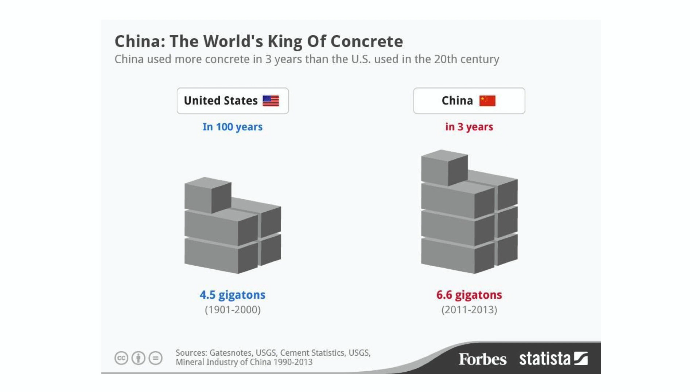Furthermore, as you probably know, buildings contribute about 40% of global carbon emissions, and concrete alone makes up about 8% of global carbon emissions. Yet, by many accounts, there is not even enough sand of the right type to make even the concrete foundations for all of these buildings of the next 30 years. In other words, it's impossible to think about the climate crisis without thinking about architecture and without thinking about scale.

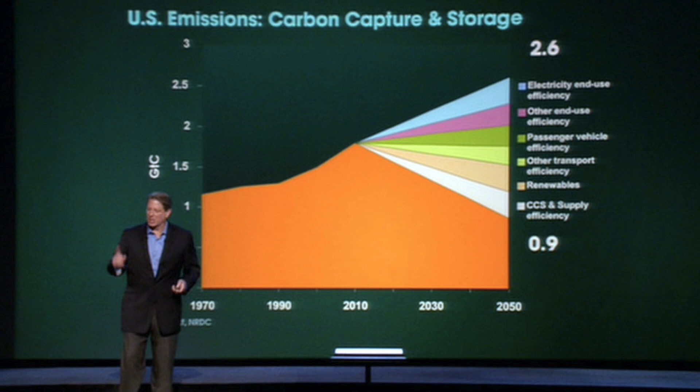So it may be tempting to look for single changes to fix the problem. Technologies like carbon capture, shown here, or new ways of making concrete, getting rid of that 8% of carbon emissions, or low-cost solar and wind power, or even lifestyle shifts. But there is a flaw in that science indicates that a single fix is impossible. Instead, we need what are called climate stabilization wedges, as Al Gore showed in his film Inconvenient Truth.

But maybe more fundamentally, I think it's important to consider that single technology fixes, and even climate stabilization wedges, should not be developed in isolation. In fact, they may have some unintended consequences if we don't think them through carefully.

You may have read this same devastating story that I read about a year ago in the New York Times, with the title: 'Palm Oil was supposed to help save the planet. Instead, it unleashed a catastrophe.' I'll just summarize that story here. It's a story of a misguided United States policy that also became European policy to ramp up the use of vegetable oils, such as palm oil, in fuel, including gasoline, with the ambition of reducing carbon dioxide and curbing global warming.

Palm oil trees grow in tropical climates, such as Indonesia, and each tree produces these 50-pound bunches of walnut-sized fruit that are full of an oil that's more versatile than almost any other plant-based oil. So the idea was to encourage the use of vegetable oils in fuel, and potentially by encouraging more palm oil production.

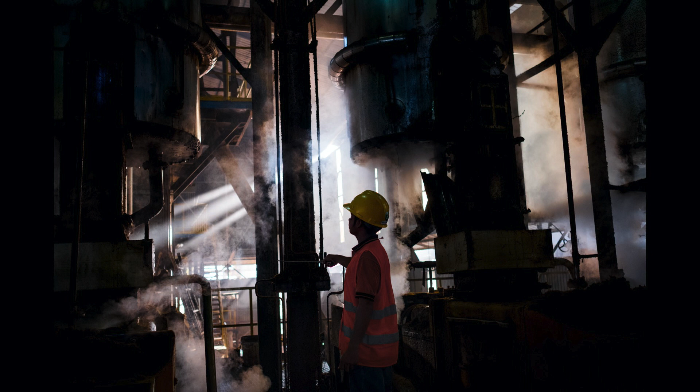So instead of creating a clever technocratic fix to reduce the United States carbon footprint, lawmakers actually, in the words of the article, lit a fuse in a powerful carbon bomb that, as the forests were cleared and burned, produced more carbon than the entire continent of Europe. Indonesia then jumped to become the fourth largest emitter of carbon. The unprecedented palm oil boom, meanwhile, has enriched and emboldened many of the region's largest corporations, which have begun using their newfound power and wealth to suppress critics, abuse workers, and acquire more land to produce more oil.

So I guess my point here is that instead of looking for single technology fixes and trying to design single technology fixes, I think what is more likely to address the problem, even if we're single-mindedly fixed on that problem, is to design new systems - and this comes with understanding architecture itself as an open system.

So I believe that as citizens and as architects, of course, we will have to become more literate in terms of the numbers - which actions and activities have which impact, what are the biggest levers, what are the sizes of the climate stabilization wedges.

This is a kind of system diagram that we don't need to understand the details of, but just to get a sense of some of the interconnected forces and relationships in the biochemical pathways in what's going on in cells and biology. So systems we might look for that involve designing energy and materials and labor, as well as the typical form and function of a single building.

And of course, thinking about architecture as a system is not new for the discipline. People like Howard Odum and Buckminster Fuller were advocating for holistic thinking many years ago, drawing some of the diagrams like this. And it's clear to me that, and to these precedent thinkers and designers, that architects have the potential to redesign systems that are much larger than buildings, systems that involve global flows of energy and raw materials.

As Rosalie noted, this actually suggests a redefinition of architecture. We could say that architecture should involve a longer duration and a wider geography, more time and more space than we typically consider. And we could imagine that architecture really is, at heart, an open system.

And this kind of thinking about systems has been advanced more recently in other areas such as food. So the chef and writer Dan Barber explains how the initial framing of the farm-to-table movement, which he helped found, actually turned out to be wrong.

And he writes, "Science teaches us that the answer to understanding the complexity of something is to break it into its component parts. It insists that things need to be precisely measured and weighed. But interactions and relationships cannot be measured or weighed. Our belief that we can create a sustainable diet for ourselves by cherry-picking great ingredients is wrong because it's too narrow-minded. We can't think about changing parts of our system. We need to think about redesigning the whole system."

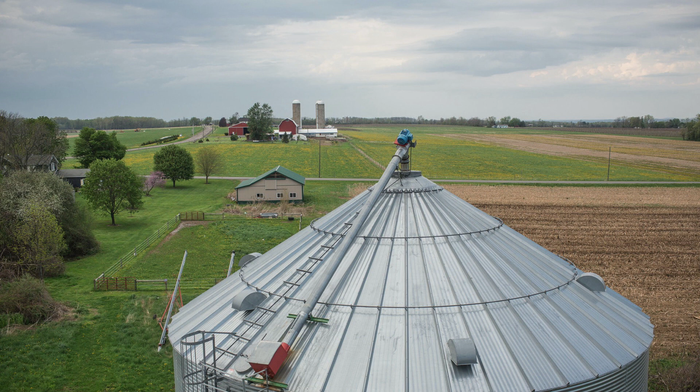And as an example, Dan Barber picks wheat and describes how a New York farmer that he knows named Klaas Martens grows a sustainable emmer wheat, and he has resurrected a lost flavor that has actually contributed to Barber's own cuisine, a cuisine that wins awards.

So Barber continues by writing, "The secret to great tasting wheat is that it's not about the wheat, it's about the soil. Martens designs the soil, not the wheat, and he does this through rotation farming and working with the larger system."

By extension, we could say it's important to simultaneously design all of these things at once: the grain, the soil, the food plate or the cuisine, and even new flavors. And perhaps for architecture, we could say it's important to design the material, the materials factory, the

processes of the material, the building, and even new building typologies all at the same time. In this sense, architectural materials should no longer be considered static and permanent, but instead dynamic and continually transforming. And architects should take the initiative to actively design these kinds of transformations. In other words, to address the urban growth I just described, single, fixed, solitary architecture projects won't cut it.

The climate crisis gives us new urgency and new context to think about architecture as an open and dynamic system. And tonight I want to share several rough examples that I think may be relevant and instructive in this context. These examples are not perfect. In fact, some of them may be problematic in some ways.

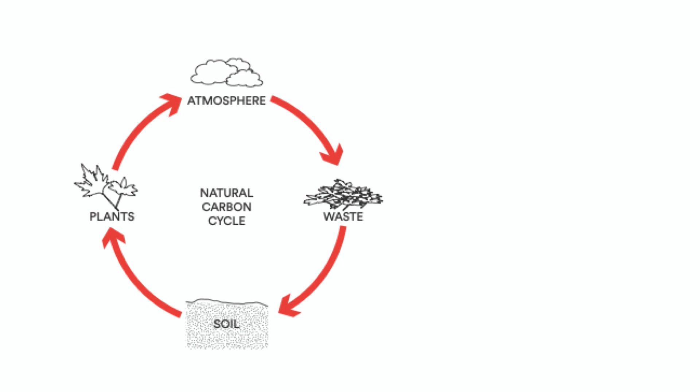And at the Living, in my own design studio, we've experimented with materials that are grown from the root-like structure of mushrooms called mycelium. We began here by thinking of a system of architectural materials and its relationship to the Earth's carbon cycle, the endless loop of growth, decay, regrowth, and transformation of carbon.

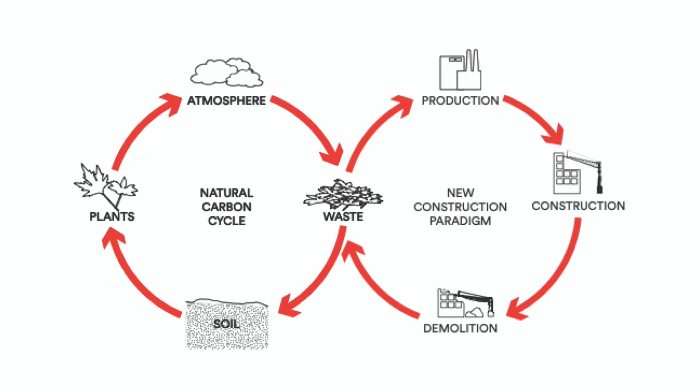And starting with this concept, we had the idea that maybe we could take low-value raw materials, in other words, waste, spend a small amount of energy converting those raw materials into building blocks, make some kind of building or structure, and at the end of the useful life of that structure, take all of that physical matter, all the materials of the building, and return them back to the carbon cycle.

And the way we set out to do this was with living organism and grown materials. So here is the branching structure of mycelium shown in a microscope video.

It turns out if you combine mycelium with agricultural waste, so not the high-value part of agriculture, for example not corn kernels, but the low-value part, just chopped up corn stover, combine mycelium and this agricultural waste, put it in a mold of almost any shape, and in about 5 days it grows into a solid object, which could be used for a number of different design applications.

So our collaborator, this great company in upstate New York called Ecovative, is using this material as a replacement for styrofoam in packaging. And our idea was to see if we could use it for a new kind of architectural brick.

And of course, we had to do a lot of testing. Here we were working with another collaborator, the Strength of Materials Lab at Columbia University, also with some structural engineers at Arup, testing single bricks and small assemblies of bricks.

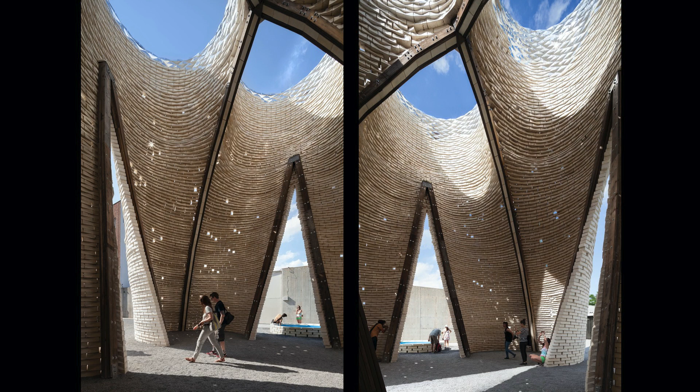It offered a relationship to municipal artists and nonprofits, and also to local community gardens. People working on the project included local artists, local trade school interns from the Brooklyn Navy Yard, international graduate students from Columbia, construction professionals, engineering professionals, and also people from nonprofits such as the Brooklyn Grange. All people involved in the project, as we were engaging a kind of labor even in this experiment, were meaningfully engaged and fairly paid.

The project also engaged a diverse public through its high-profile installation at a museum. Considering the project as an example of this idea of architecture as an open system, the project involved multiple sites, multiple scales, multiple collaborators, and maybe most essentially, multiple timescales.

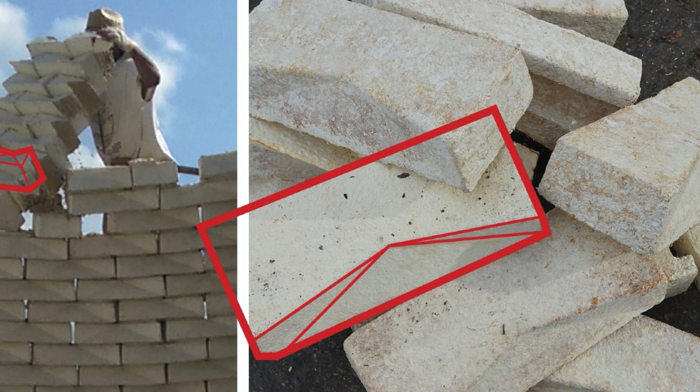Because at the end of the summer, we took apart the structure, crumbled the bricks into smaller pieces, combined these pieces with yet other living organisms in terms of worms and bacteria. In about 60 days, all of the bricks, the entire structure, was returned to soil through composting, which we gave for New York City tree planting and also for local community gardens, in essence showing that this was a non-toxic enough material that it could in turn be eaten.

So for our design studio, the project involved not only a kind of strange test of a new material, but also tools and insights and approaches that we think can be reused on other projects in the future. In other words, it can help us when thinking about architecture as a system to not start every project from scratch. Along these lines, I think it's interesting to note that 3M, the large materials company, which is actually known for inventing things like the Post-it and Scotch tape and using a lot of petrochemicals.

But 3M is investing heavily in mycelium materials, which is a whole other topic, but I think it's interesting to note their reasoning, or at least their stated reasoning.

They think that mycelium materials can be a materials platform like plastics. In other words, we know that plastics can make materials that are like fabric, and they're flexible, or they can make material that's hard and rigid. There are materials in plastics that are foam-like and lightweight, also materials that are dense. At 3M and many other biologists and scientists think that mycelium materials might be able to offer a similar materials platform, a substitute for our reliance on petroleum-based materials.

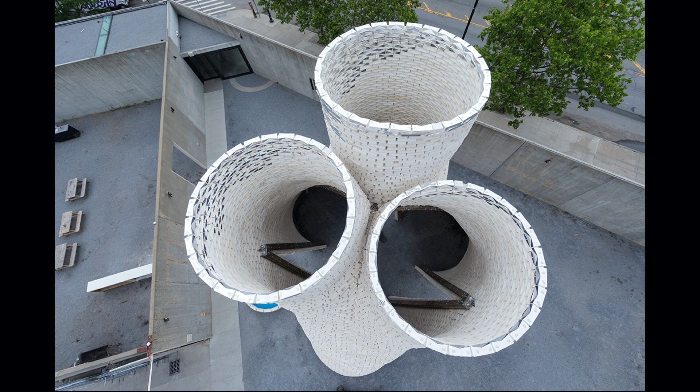But I think along these lines, maybe we could say that with systems, a change in one element makes you rethink many other elements. A mycelium brick is not only a replacement for a clay brick or a concrete brick, it's also a new type of brick and a new way of thinking about materials themselves.

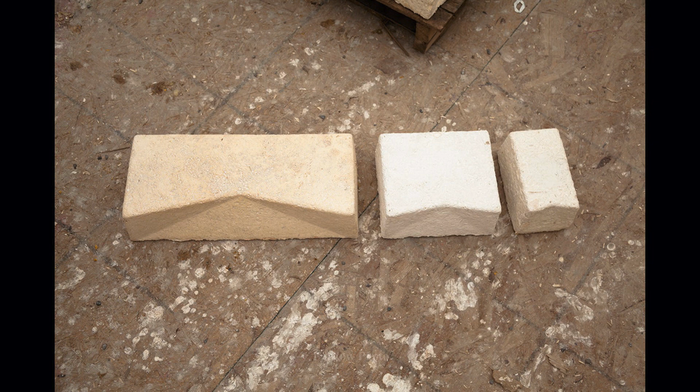As a biomaterial, mycelium bricks have a different relationship to resources, and they also have different physical properties. More specifically, a mycelium brick can be a living material with some of the properties of other living organisms, like growing and self-healing.

So for a new series of projects that we've been doing recently with mycelium materials, we developed the potential, or explored the potential, to create a living material that would bind to itself, essentially being brick and mortar in the same material because it's a living material. We called this process biowelding. You can see a close-up of that here.

So the first project that I'll show that we have done recently with this material and this new approach involved a small test of assembly of this kind of self-binding material, these units. In other words, we made units, spherical units, of two types. One was a mycelium type of unit, another was a wood type of unit, and we developed a logic for stacking them where we knew that mycelium units would bond to mycelium units, and would also bond to wood units because they like the cellulose in wood, but wood units would not bond to wood units, as we all know. So you can use a kind of scaffolding, and maybe a new way of thinking about the logic of 3D printing, to create a kind of structure that binds together and can create new kinds of forms and spaces.

And again, it was important for Chris to think of these materials themselves as systems. The raw materials came from a specific place—in Chris's project, the sugarcane came from Brazil. They were transported and manufactured in specific ways, in this case on site near the agricultural fields. And there was a specific kind of labor involved, multiple jobs by local and international people. So Chris designed the whole system, not just the material, not just the architecture, but the whole ecosystem and the whole potential new future.

Here's a little bit from Chris's project statement. He says: 'The coming biological age offers us an opportunity to reassess the notion of sustainable design. For my building'—this is Chris speaking—'a research complex in the sugarcane fields outside of Campinas, Brazil, I've employed the grown material of bacterial cellulose. In order to engage the manifold issues of incorporating a new technology and material politics, I have created a series of narratives for 7 different actors.' Chris continues, 'These narratives inform the design of the building, each with their own set of representative media.'

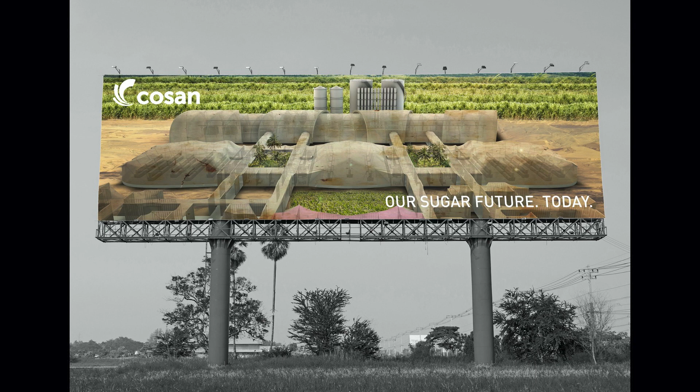We are all complicit in the Anthropocene, but rather than eschewing our current systems, we should evolve our individual roles to accommodate a greater ecology. I should also note that this project won a prize offered by the Buell Center, directed by Reinhold Martin at Columbia GSAPP, called the Paris Prize, designed to encourage student projects addressing the climate crisis in the spirit of the Paris Agreement.

Okay, number 2, embodied energy. Some of these approaches I'm going to describe in more length than others, so some of them will go much quicker.

Embodied energy is a measurement and a concept that can help us see the systems involved in architectural materials. And as Rosalie mentioned, this is a subject we have explored at Columbia GSAPP in a multi-year research project, a symposium, and a book.

The book has great contributions, and also the symposium had great contributions from a wide variety of people, including architects, engineers, material scientists, historians, and curators, and also including Michelle Addington, Anna Dyson, Kiel Moe, and Forrest Meggers, who have all been part of this event series.

The research, in a way, begins where I began the lecture, with the well-known fact that buildings account for a third or more of global waste, energy consumption, and carbon emissions. But what may be less well known is that embodied energy, defined as the energy required to extract, produce, transport, and assemble materials into buildings, has been increasing dramatically over time. In fact, by 2050, a third of global carbon emissions, and by rough association, a third of global energy consumption, will come from making, not operating, our buildings and cities.

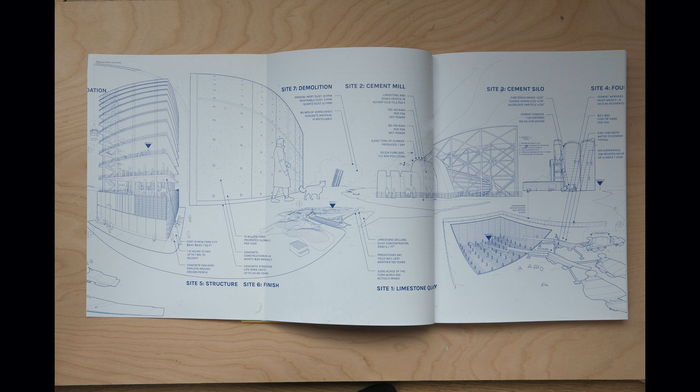But after these data visualizations, we quickly realized that the data was not enough. We also needed to understand the qualitative and relational aspects of embodied energy. So we moved to drawing material stories, the narrative of a material like concrete or wood or steel, from extraction to factory production to transportation to construction. This is, in a way, a new kind of system diagram that shows the qualitative as well as the quantitative features of these material systems.

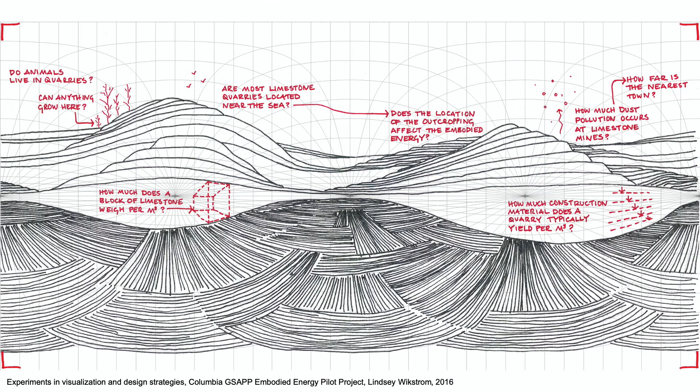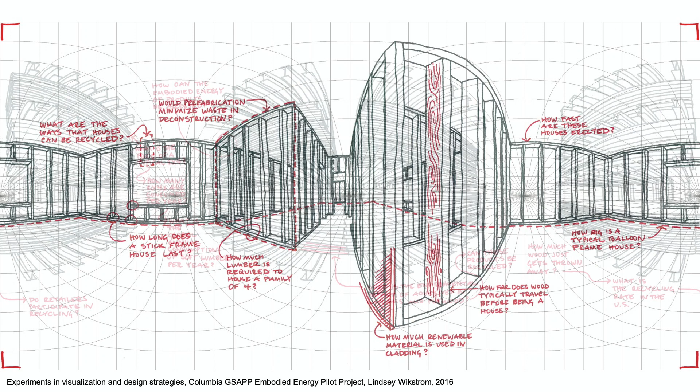We also use this kind of system thinking to open up questions rather than deliver answers. So at each of the sites involved in the production of architectural materials, including extraction, factory production, transportation, et cetera, we started to ask questions about what was going on, about what the impacts were, about what were some of the invisible forces at play, using drawing to open up questions rather than just deliver a known answer.

Ultimately, I think this project and the framework of embodied energy is an exploration of the complexity of the systems involved in architecture, from a variety of perspectives. But maybe more than that, the book and the project are a lens through which we might see all kinds of invisible but essential features of architecture, such as embodied water, embodied carbon, and embodied labor. And it may allow us as architects to discover and search for new ways of building, but also new forms of creativity.

Substituting manpower for energy. Again, thinking about systems, it matters where the energy came from. In architectural materials, it matters not just how much energy, but where the energy comes from. For example, solar power to make steel is better than coal power to make steel, although it's important to understand the whole ecosystem of power generation. And it also matters what kind of human labor is involved, as I mentioned previously.

One fascinating framework for combining energy and labor comes from almost 50 years ago. In 1973, a young Swiss architect named Walter Stahel was working on a study for the Commission of the European Communities, searching for ways to save large amounts of energy in the construction industry—part of the same problem we're working on now. Instead of looking at technologies such as more efficient lighting or cooling, Stahel turned to behavior patterns and socioeconomic issues. He noted that some of our major problems are interlinked and cannot be solved one by one.

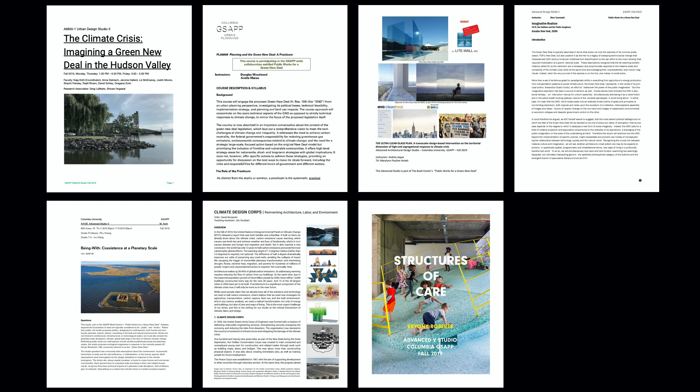Here are a sampling of some of the advanced studios at Columbia GSAPP that are engaging this topic.

Within this framework of public works for a Green New Deal, my own studio adds two hypotheses that deal a little bit with this idea of architecture as system. The first is Climate Design Corps. In the spirit of the Civilian Conservation Corps, the Peace Corps, and AmeriCorps, the studio imagined a new Climate Design Corps, taking a critical look at the earlier models and reinventing them in the context of public works for a Green New Deal.

Like its predecessors, our Corps called upon young people to commit to a year of service, to work together in teams, to receive training for meaningful jobs, and to work for the public good. Similar to many of the individual AmeriCorps programs, our Corps emphasized diversity of participants and promoted social equality through collaboration. But our Corps was more environment-focused than AmeriCorps and more design-focused than any of the precedent corps.

The second topic was low-carbon materials, which I've already talked about in the beginning. In addition to inventing a new climate corps, this studio focused on low-carbon materials. We studied biomaterials like bricks made of bacteria and sand—here I'm thinking of Ginger Dosier and her company Biomason—as well as carbon sequestering wood, repurposed materials, prefabrication, and buildings as material depots. Operating at multiple scales, we created materials, designed new buildings and infrastructure, and developed new systems for material flow and life cycle impact.

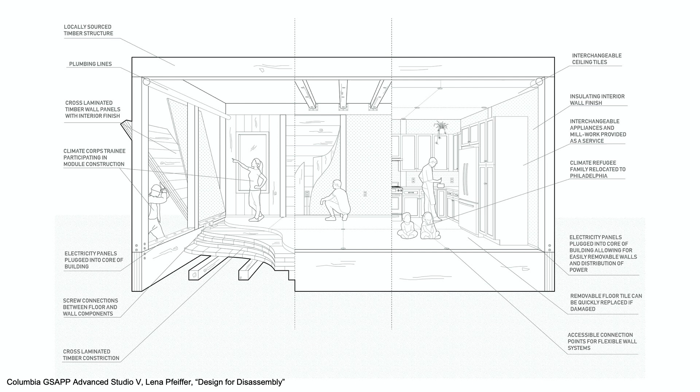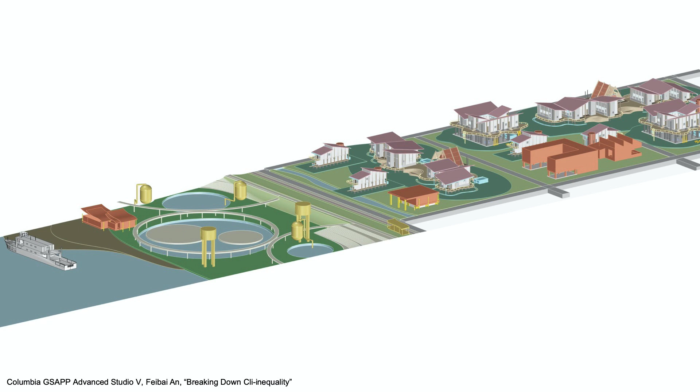So to give you a sense of some of the projects, which are works in progress the students are wrapping up as we speak: the projects include explorations in design for disassembly, the idea of a zero waste Manhattan where nothing leaves the island, and redrawing the flood risk map to account for social equality and the ability of different people to rebuild after a disaster, focusing on those qualities in addition to the elevation above sea level.

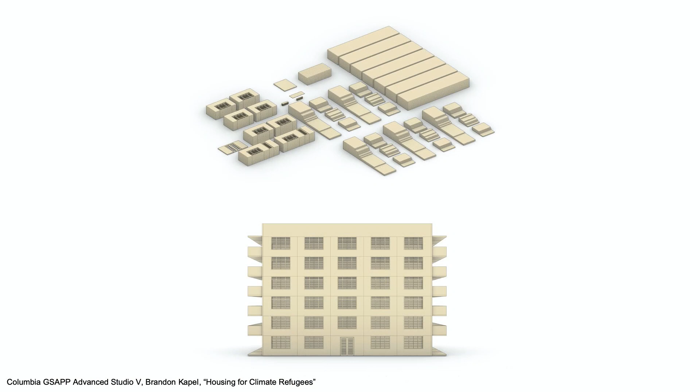Rewilding the city - this is related to the E.O. Wilson concept of half-Earth. Creating housing for climate migrants, both domestic and international. And you probably know and have read that the UN estimates there might be as many as 1 billion climate refugees if we get to high levels of warming.

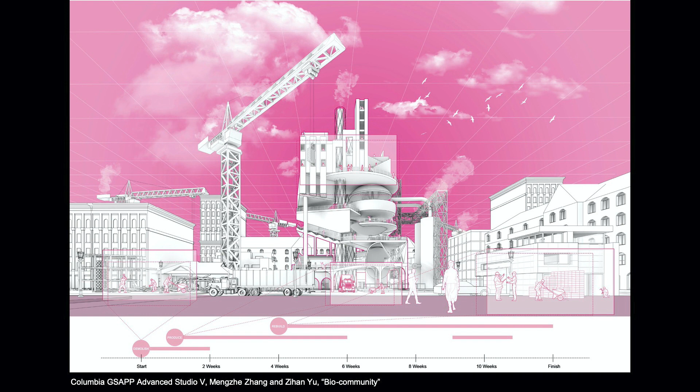Bioconcrete manufacturing to transform this material, concrete, that makes up 8% of global carbon emissions. And finally, transforming the architecture profession itself and architectural labor with an open source ethos and 3 types of architectural licenses instead of 1.

5, pledging. So collective action is a kind of system thinking as well. The Paris Agreement and some earlier precedents of global action, for example to ban chlorofluorocarbons and protect the ozone layer, are examples of this kind of collective action. And I think we could say that action is more powerful and effective when it's coordinated. The same is true for climate change and design, climate change and architecture. Coordinated design action is necessary.

And we've seen a range of pledges recently related to sustainable and carbon neutral architecture from countries as part of the Paris Agreement, from states, New York State included, from cities, New York City included, from building owners, and also architecture firms, engineering firms, and even contractors.

These pledges range from individual kind of declarations, like the firm Snøhetta just announced, to collectives, to the idea that has gained a lot of momentum in the UK under an organization called Construction Declares or Architects Declare, where many UK architecture firms and also UK engineers have made a kind of pledge to address this problem in some way.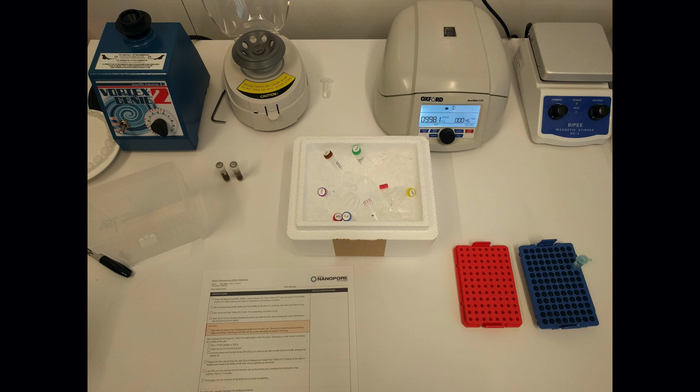So here are the basic steps. First, swab the sandblasted wood tiles from each location, here at Storefront, but also at the Brooklyn Navy Yard and other places, to collect the microbes living on the surface. Second, place the swab in a liquid solution and agitate it to break down the cell walls. Third, separate the DNA from other substances.

Fourth, add marker beads to the end of the DNA fragments and produce a pure DNA solution. Fifth, load the DNA solution into a flow cell to be processed by a portable DNA sequencer. Sixth, the sequencer converts electrical charge into sequence data, the ATCG of genetic code. Then finally, after we sequenced the data from each location, we designed a system to automatically draw the output as an early and rough map to an uncharted territory.

This map is raw and is at a coarse resolution, but it allowed us to start seeing some interesting things. For example, in the Brooklyn Navy Yard, we saw microbial DNA that performs the function of breaking down heavy metals, which indicates that the Navy Yard has specific pollutants that were not found in Soho.

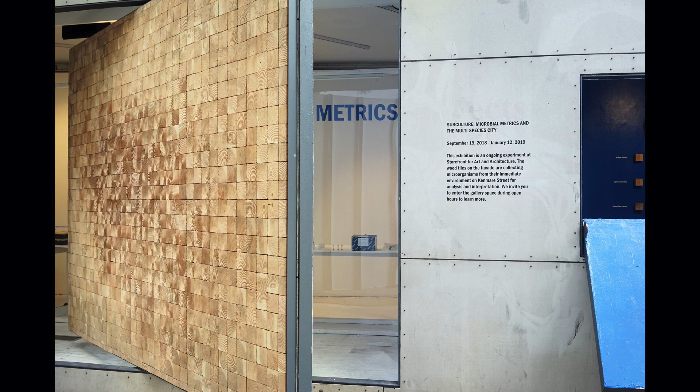Overall for this project, we were imagining architecture as a broader system. We're using the gallery installation as an active living experiment. We're exploring a new architectural envelope and a new way of seeing some of the important matter and organisms that help keep us alive as humans.

We're looking at materials and their layers of living matter, looking at waste and its microscopic scale, looking at a version of multi-species architecture, designing not only for humans, but for other species and for biodiversity, which we as humans ultimately depend on.

We're reframing buildings themselves as stewards for the urban microbiome. And the initial evidence indicates that our collective future, our future in relation to climate change and design, the future of the built environment, the future of all humans plus all non-human animals and all microbes, is probably a lot more collective and interdependent than any of us can see or imagine. Thank you.

Hello, Forrest. I am from Iowa, so you get a hug. Good to see you. Good to see you. All right.